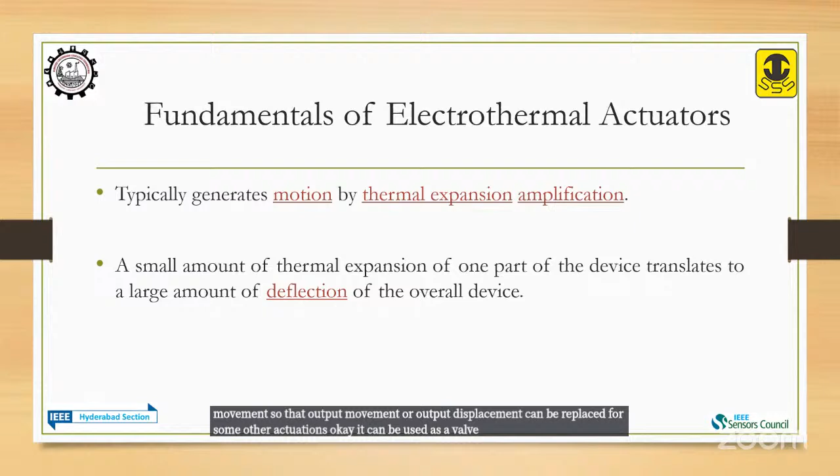The main advantage of using an electrothermal actuator is that it can generate comparatively better output displacement due to its thermal expansion amplification. That's the main advantage of choosing an electrothermal actuator. So even when we are giving a small voltage, some corresponding thermal expansion will happen in the device as an output movement. That output displacement can be utilized for other actuations. It can be used as a valve, it can be used as a switch.

The main working principle of the electrothermal actuator is Joule heating and thermal expansion. What do Joule heating and thermal expansion mean? Due to the potential difference across the device, there will be a current flow through the device. When there is a current flow through a material, obviously there will be a thermal expansion. That thermal expansion will be treated as the output displacement. Here with the picture I can demonstrate that.

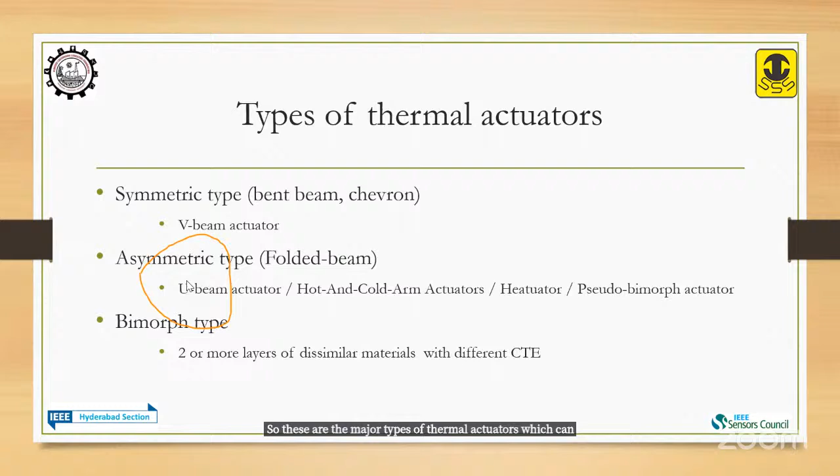And the last one is the bimorph type. The main difference from the previous ones is that here different types of material will be coated over the device, having different CTE, coefficient of thermal expansion. Due to the change in CTE, the thermal expansion happening in each part of the device will be different. Accordingly, sometimes we may even expect out-of-plane thermal expansion, or thermal expansion in some particular direction. So these are the major types of thermal actuators which can be implemented under the electrothermal actuator category.

So this kind of actuation we'll be expecting. We can visualize this in our simulation when we apply the respective potential across the voltage node and ground node. There will be a thermal expansion in this direction. So in the V-beam actuator, we get thermal expansion based on the inclination which we design in the structure.

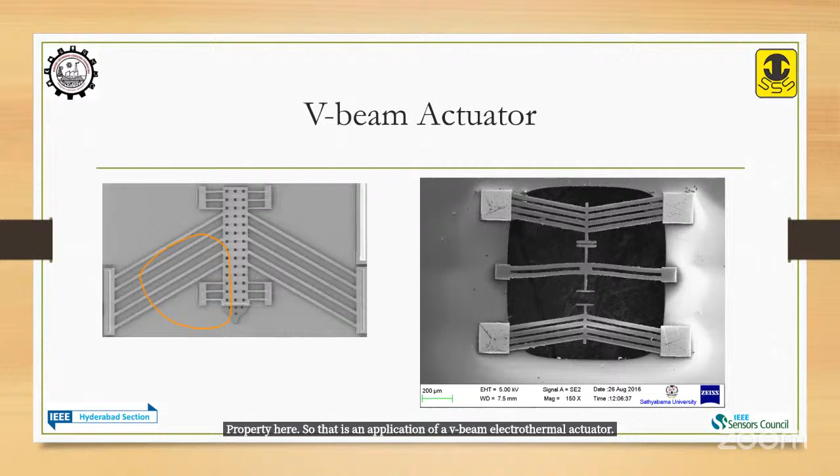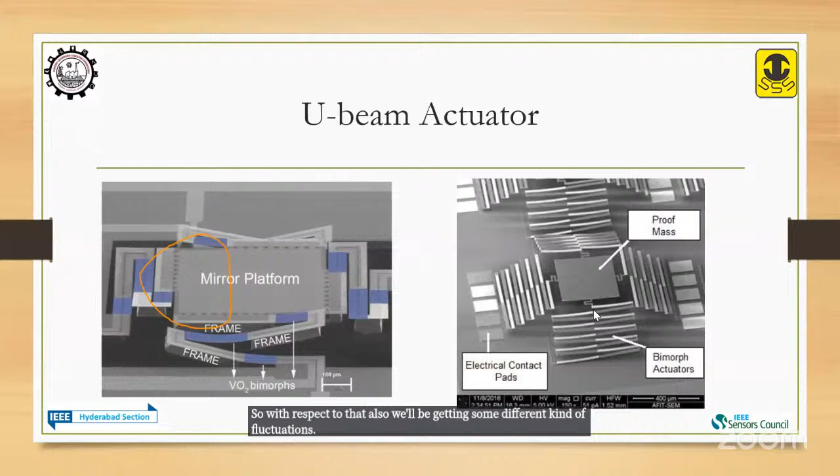Okay, and this is a sample image of a bimorph actuator. Bimorph I already told. Different materials will be used. The difference will be based on the coefficient of thermal expansion. So with respect to that also, we'll be getting some different kind of fluctuations. So that is an example of a U-beam actuator.

Now we will proceed with the demonstration of how we can design one basic electrothermal actuator in the software tool. Okay, so for this purpose, I have prepared one handout. In that handout, the step-by-step simulation process is mentioned. I think that will be shared with the participants soon. And for participants who didn't install the software, especially COMSOL Multiphysics 6.2, I shared it with the group with the help of ma'am. So that one also can be utilized. Those who want to do it in parallel can get the software and install it. One by one I will explain each step, and accordingly we can proceed.

If someone can respond whether I can proceed with the software or not, please mention it in the chat box. Or if any further discussion on the electrothermal actuator working is required, I can explain that also. Or we will directly proceed with the simulation tool. Okay, it is downloading.

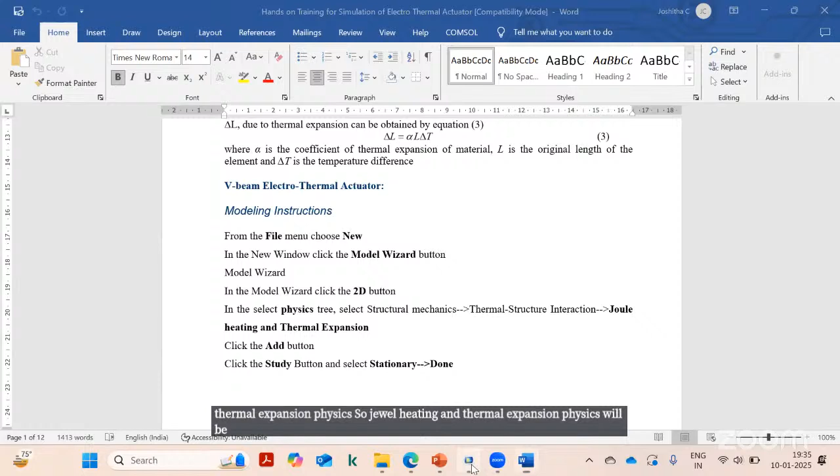Okay, so already I mentioned for the electrothermal actuator, the basic principle of working is Joule heating and thermal expansion physics. So Joule heating and thermal expansion physics will be visible under the structural mechanics. Once you install the software, there will be different sets of physics. That's why it is called multiphysics. So you can work with different physics.

Here, the electrothermal actuator, which is our interest of work, falls under structural mechanics. Okay, under the structural mechanics, there is a thermal structure interaction physics. From that, we can choose Joule heating and thermal expansion physics. The steps are clearly mentioned in the document. So once you open the software, we have to take 2D, and from the 2D it will be asking you to choose the required physics.

So once we understand what is the physics behind our design, accordingly we have to choose the physics. Here, we are going to design an electrothermal actuator. So the working principle of an electrothermal actuator is Joule heating and thermal expansion physics. Here in COMSOL Multiphysics, this Joule heating and thermal expansion physics is available under structural mechanics, under thermal structure interaction. So I am going to choose that.

Okay, so double click on that. It will be getting added to your file. So it is getting added. So once the first step is completed, we have chosen a new file, and it will be asking you to define the physics. Physics is defined. Now we have to choose what kind of study we have to implement. Okay, so study means analysis.

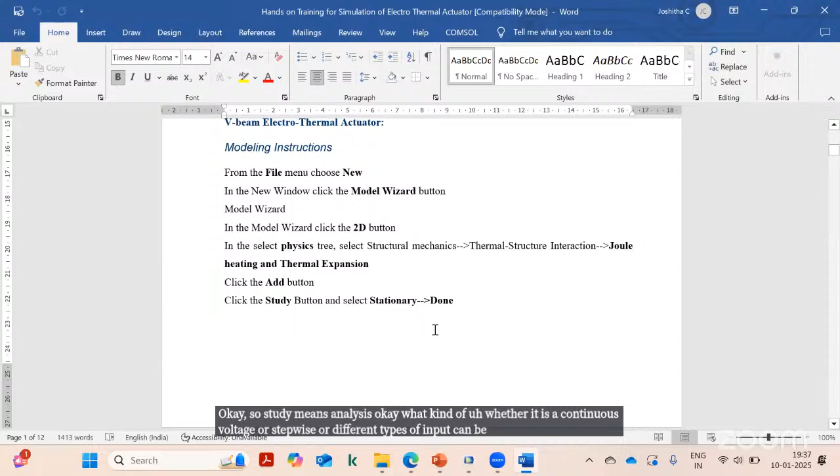Whether it is a continuous voltage or a stepwise or different types of input can be given. For example, I'm going to give a continuous voltage supply. So for that, it will be asking you to decide the study. So study can be a stationary study or a time dependent study. So I prefer to do here the stationary study. Stationary study means suppose I want to give a voltage supply. If I choose stationary study, it will indicate that I am continuously giving the potential.

So if you want a stepwise potential, you can define the time dependent study. So with some variables we will be able to give time defined potentials, like initially 0 volt, then 5 volt, then again 0 volt, stepwise, or different values of potential can be given. So here we prefer to use the stationary study. So click on done. So now we added both physics as well as study to the file. So it is getting added.

Once both study and physics are defined, it will be coming to a new window like this. Initially we have defined the component or the structure as a 2D design, meaning two-dimensional design. That's why we are getting a graph like structure like this, in X and Y axis. If we choose 3 dimensions, then we will be getting an X, Y, Z 3D plane. In the beginning, let us do only 2D. Then later we can convert that into 3 dimensions also.

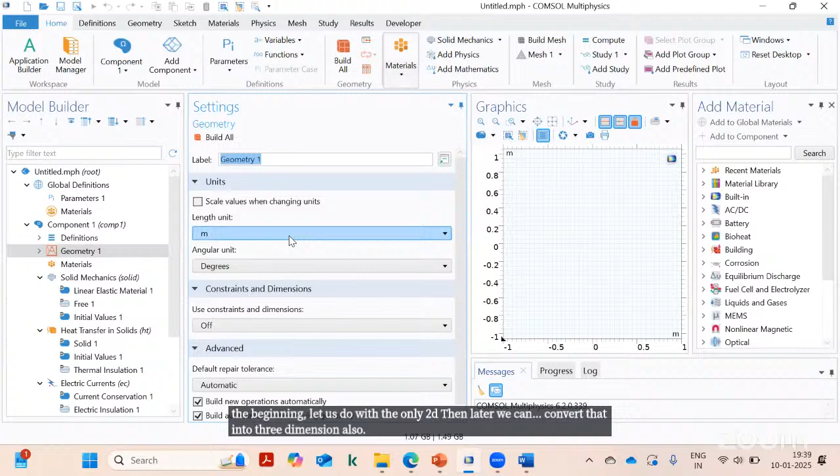So here, the first thing we have to change is the length unit. By default the dimension will be in meters, but we prefer MEMS devices in a few micrometers or in the millimeter range. So I would like to change the unit of length to micrometer. That will be mentioned here, length unit. So you can see that in the graph also, the dimension or the unit got changed. Okay, so that is our third step here.

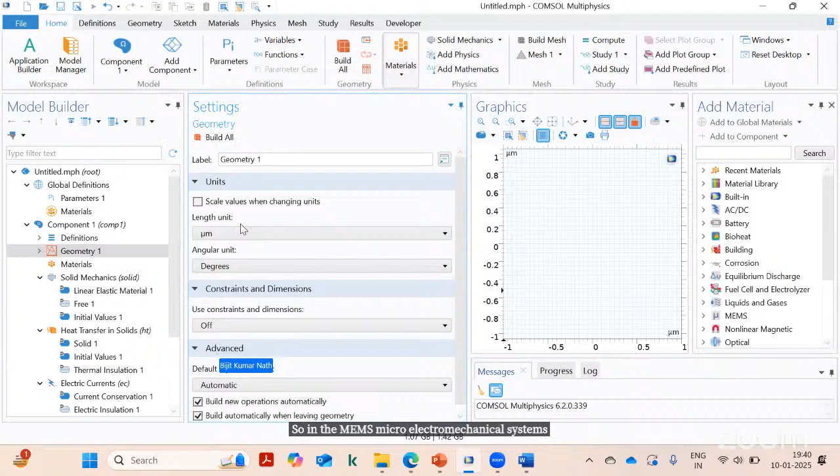So initially, for what model we are doing, we have chosen 2D. Then what kind of physics to be added, that also we have done. Next, what kind of study we have to do, the stationary study, we have chosen. Then what length unit we preferred. In MEMS, micro electromechanical systems, we prefer micrometers. So I have chosen the unit as micrometer. So these are the initial steps we have to follow. The same things are mentioned in the document also.

Okay, so here there are different options. First one is creating the geometry. If you right click on this geometry, there are different options. In the pop-up window, you'll be able to see you can draw a circle, ellipse, rectangle, square, or any other structure. So depending upon our design structure, we have to choose the shape.

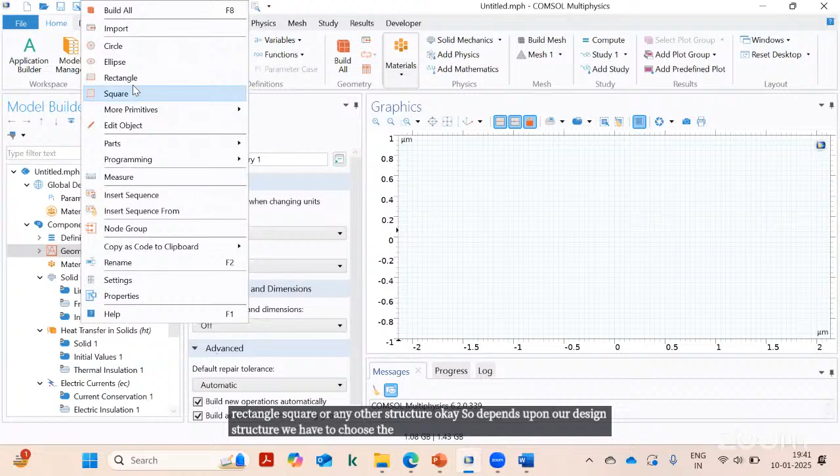Here I need a rectangle first because I need the anchors. In the V-beam actuator, I have multiple rectangles where we have to define how much length and how much width is required for each beam. So here I need the first anchor, the voltage node or a ground node. I can define it according to the dimension. I'm going to give the length and width as 100, and then we have to click on build selected. So here width and height is mentioned. There we have to enter the dimensions required for our structure.

Our V-beam has two anchors like this. One anchor will be used as a voltage node, another anchor will be used as ground node. So how to define this? For that I have chosen the first one as a rectangle by right clicking on the geometry. From the geometry I will be choosing rectangle, and I'll be mentioning the size of that rectangle as 100 micrometer and 100 micrometer. You can even consider a square. A rectangle can have a different length and width. Here I am considering the same length and width, so it can be a square also.

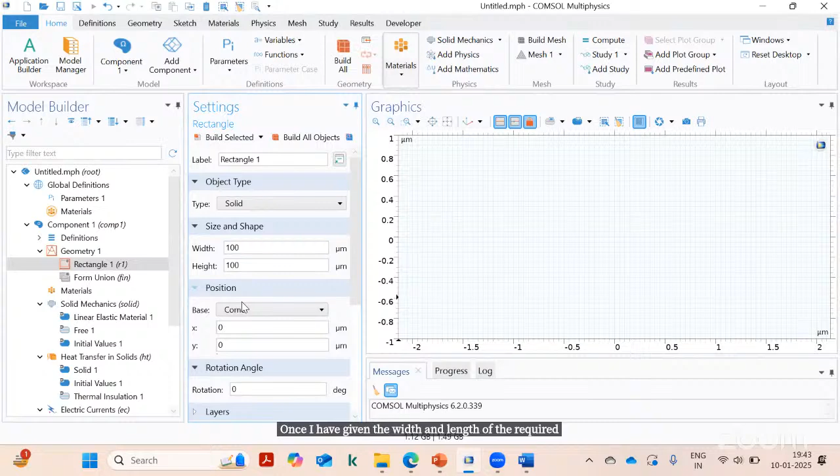And this position indicates at what point it will be started. So the origin will be like this, from the X and Y axis where the dimension will start. Once I have given the width and length of the required rectangle and where it is placed, that also we can mention here. Initially I am keeping it as 0, 0. Once I click on build, I will be getting a new structure like this. That means one rectangle is drawn here.

Then next step, we can adjust the position. I want it around minus 100 micrometer away from the origin in the x direction. That I can mention here in the position as minus 100. That indicates that from the origin, this particular point will move back minus 100 in the x direction, the negative x direction. Once again click on build, and you can see now the position got changed. Now it is minus 100 and 0, the x and y value of this point. That depends upon the designer; we can choose what position to keep.

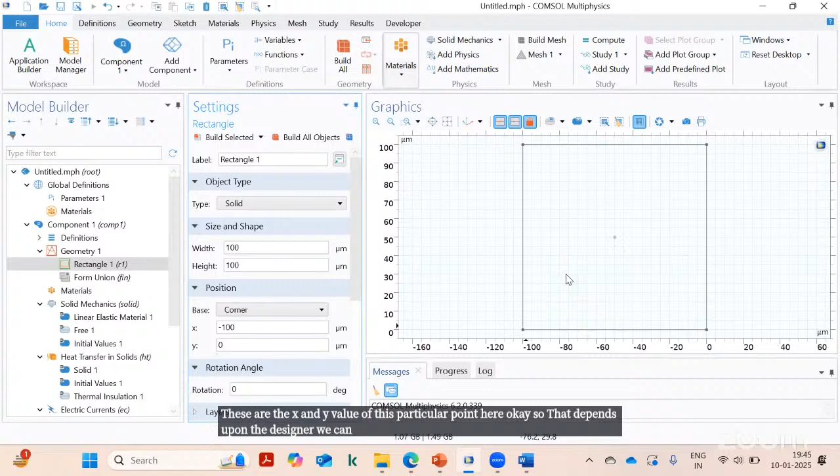Here we can see a few more things, like rotation angle. Sometimes we have to give some inclination to some of the beams. Then we can define how much degree of inclination is required for that particular beam here. Since this is a fixed anchor, I don't need any inclination, so I'm just keeping it like that. Now I need some extra parallel beams here to make the V-beam structure.

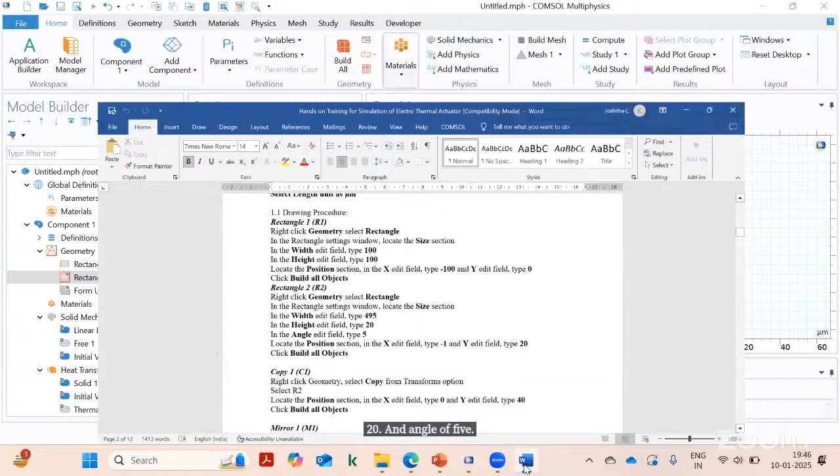So again, go to the geometry, click on the rectangle. The required dimension we can mention here. In the document I have mentioned how much dimension is required; these are predefined values, and depending on your requirement you can adjust them. I am giving the width and height as 495 and 20, and an inclination angle of 5. So I'm keeping 495, 20, and angle of 5. Position I have to verify; here position will be the same.

You can see that here one beam got placed. A little adjustment we have to make here. In order to visualize this point, I am zooming in using this zoom tool. I can make some adjustment in the position, like -1 to make it a little more inward. And the y value also I can adjust a little to move this point up.

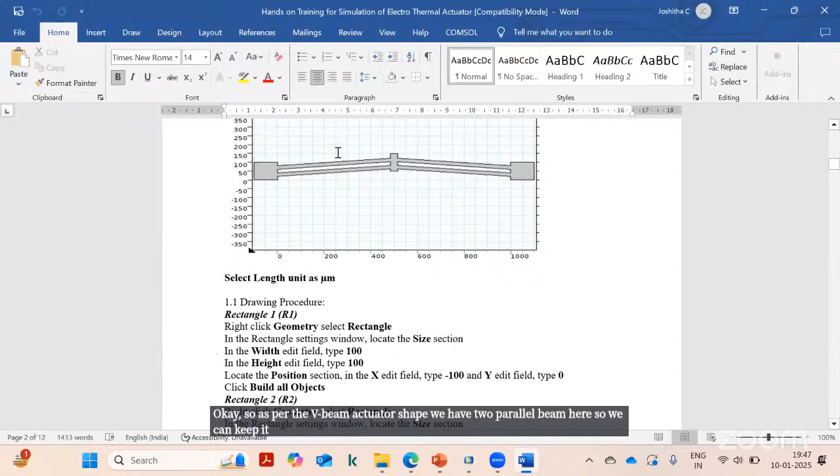So now if you visualize, you will be able to see a fixed anchor here and one inclined beam here. Okay, so as per the V-beam actuator shape, we have two parallel beams here. So we can keep a copy of our bottom beam as a top beam. So in order to do that, we can copy the same.

For that purpose, the copy option is available under geometry. You have to click on the transforms. If you right click on the geometry, there are transform options. Under the transform option, click on copy. It will ask you which object to be copied. So that object you can click like this.

If you bring your mouse pointer over the particular element to be selected or copied, click on that. Okay, so you can see that that particular element got selected. R2 is nothing but our second rectangle which we defined. So this is our first rectangle, this is our second rectangle that we defined here, and there is an option called keep input object.

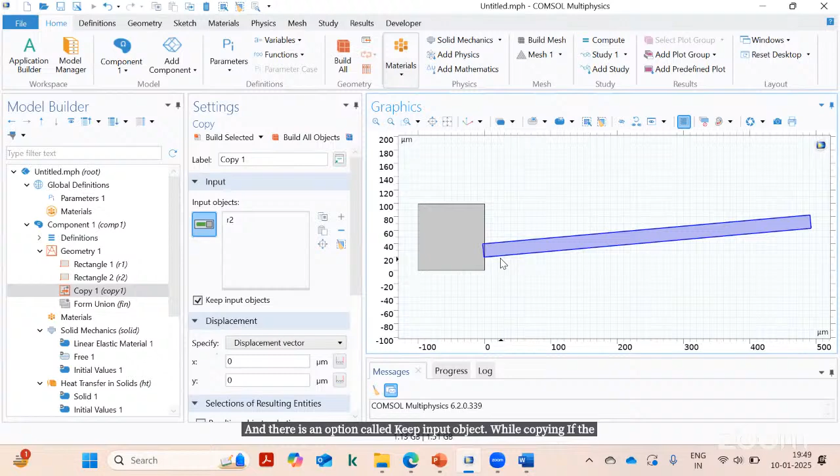While copying, if the first object is to be copied and maintained there, then you can put the tick mark there. If you want to just copy and delete the first one, then you can untick it. I need both beams in parallel, so I'm keeping the same. And here we have to specifically mention how much displacement from the previous there should be. That is the displacement vector, from the initial input object.

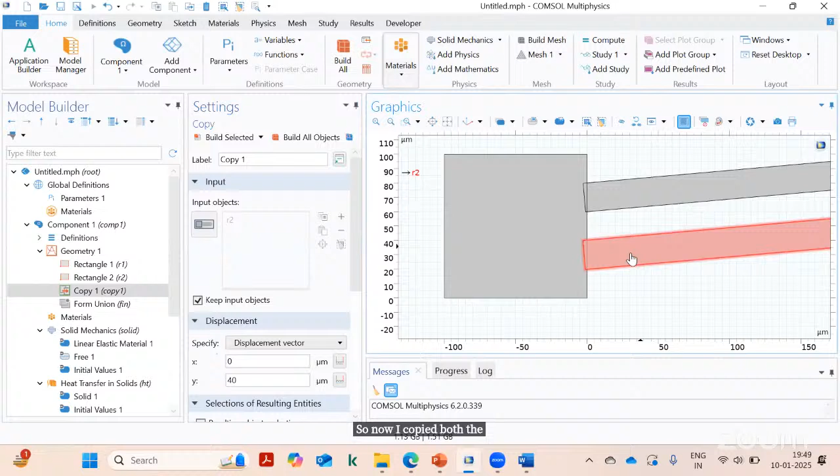In the document, I mentioned the displacement as around 40. I need 40 micrometers above, so in the y direction, in the upper direction only. So I think you got the idea. So now I copied both the beams here. First beam is here, second beam is here. Since keep input object is ticked, both are available. If this is not there and I build, the previous one will get unselected. So I need both at a time.

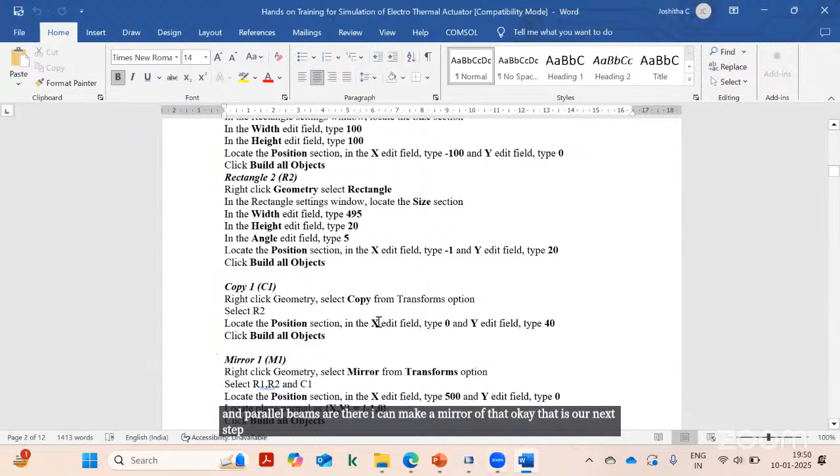So I got both beams here. Now we are defining a symmetric actuator. We know that the V-beam actuator is an example of a symmetric actuator. So with respect to the origin, both sides should be similar. So I can make a mirror image of this part, the anchor and parallel beams. That is our next step, which is mentioned in the document. So that is the mirror option.

The mirror option means whatever component elements are available on the left side can be mirrored on the right side also. For that I am going to choose the mirror option, also available by right clicking on the geometry. Go to transform and there is an option called mirror. Previously we used copy, now we use mirror. Again it will ask what input objects are to be considered. I need the mirror of this fixed anchor and these beams also.

And also I need to keep the input objects. I need both sides symmetric, so I will put the tick mark here. These are the initial setup for mirror. And how far it should be mirrored, we have to mention the position. I'm keeping the x field as 500, y field the same. So around 500 micrometers displacement in the x direction. Only the point of reflection I am mentioning.

And this normal vector to line of reflection means in what way it should be reflected, whether it should be flipped with respect to the x-axis or the y-axis. For us it should come in the opposite direction, so in the x direction it should get flipped. So I am giving x as -1, y as 0.

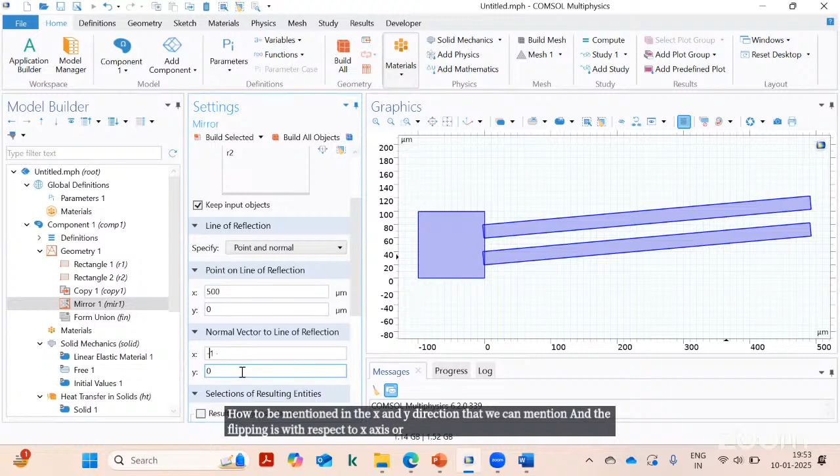So the mirror is very easy. Whatever objects are to be considered, we select as input objects. If the input objects are to be kept as such, we put the tick mark. Then the displacement in the x and y direction we can mention. And whether the flipping is with respect to the x-axis or y-axis, positive or negative, we can mention with the normal vector to line of reflection option.

And finally, click on build selected. So now you can see that symmetrically you got both structures; on both sides you got two anchors and parallel beams. Okay, now we need a central point where it can connect both parts together. Okay, for that also we can use one

rectangle. Okay, so in the geometry, we can select another rectangle, with a dimension of width 30 and 100. Okay, so I'm going to choose that. In the geometry, go to the rectangle. I'm giving the width as 30 and 100.

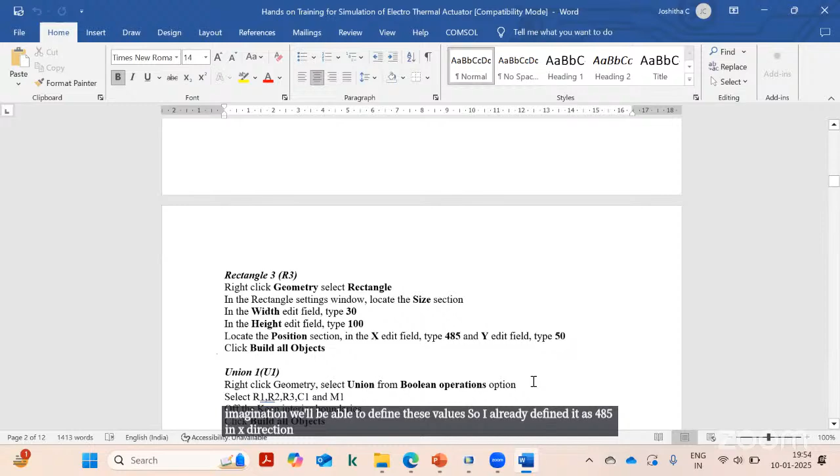And position, we have to be careful. After doing a few simulations, you will be able to understand how to give the position properly. So with some imagination, we will be able to define these values. So I already defined it as 485 in X direction and 50 in Y direction. So just enter those values, 485 and 50.

So now you understood that both sides got interconnected using a central beam. Okay, so these are the major components or elements in the geometry of our V-beam actuator. Okay, so now we want to consider it as a single element, as a single device, we have to define it. So here we can see that it is inserted here, like that. So in order to overcome that and in order to visualize the entire structure as a single device, we can make a union of each component.

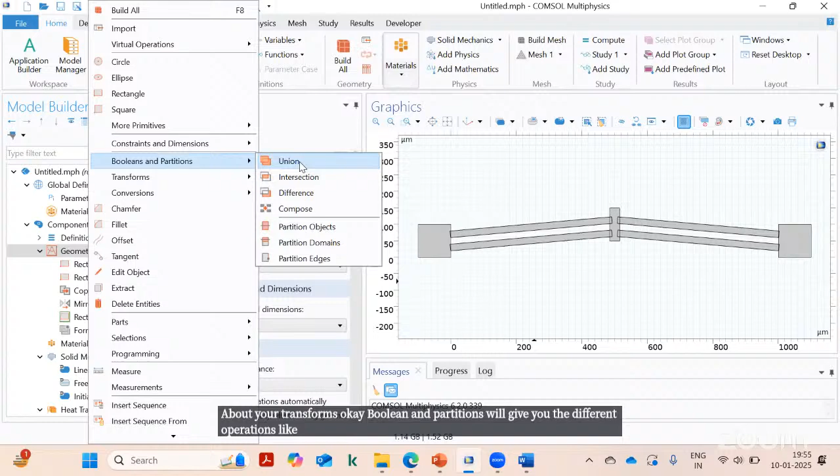For that also, you can go to the geometry and go to Booleans and partitions. One option is there above your transforms. Booleans and partitions will give you different operations like union, intersection, difference; different operations can be implemented. Here I need a union of all the elements to make it a single structure. So it will ask you the input objects to consider under the union operation. So I need all the elements. So one by one you can choose by clicking on each of the rectangles and anchors.

Okay, so I have chosen all the things and it will ask you to keep input objects or keep interior boundaries. Interior boundaries means like this. Internally you can see some kind of lines there. But as a complete object, I don't need the interior boundaries. It will not look nice. So I'm putting it as untick. Now just build and see the difference.

Now you can see all these points as an intersection here. Once I build it, you can see it as a single element. Okay, now it is a single element. With a single click, you can choose the entire element. Previously, it was one by one, individually. Now as a single element, we have developed the V-beam structure. These are the steps we have to follow for designing or drawing a V-beam actuator.

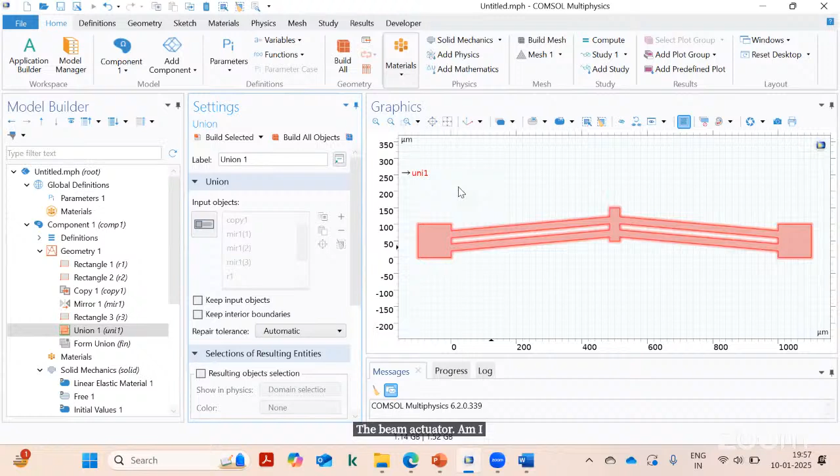Am I clear so far? If there is any doubt, please put it in the chat box. Any steps to be explained again?

Handouts are not received. Ma'am, you can share the handout also with the group, I hope. Otherwise, I will share. I have shared, ma'am. Okay, okay, ma'am. Yeah, now it is audible, ma'am. Okay. One Word document, ma'am, already shared in our group.

Confused in positioning the rectangles. Okay, I will see that. Positioning will initially be a little bit confusing, but with some 3D imagination or some kind of graphical imagination you will be able to place that. So some imagination is required, where we have to start from the origin, how much distance it will move left and right, like that we have to imagine a little bit. Then accordingly you will be able to place the position values.

Some trial and error is initially required. I also defined these values after trying multiple times. So initially, it will be a little bit confusing, but if you try 2-3 times, you'll be able to analyze, after keeping the X value as positive or negative, how much displacement will happen.

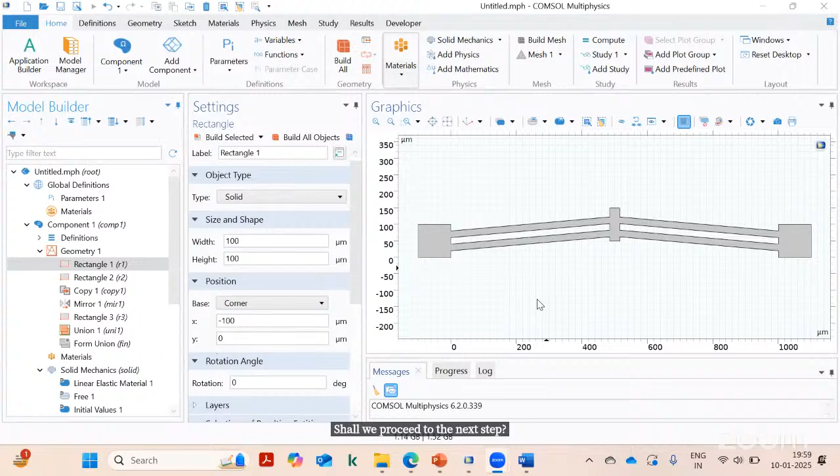Any other thing? Okay. Shall we proceed to the next step? So far, we discussed only the geometry implementation.

So I think geometry is clear to all of you. Now we have to apply the material to the geometry. Okay, now we have a V-beam structure here, and what kind of material is to be applied on this V-beam? Usually, with the help of IISc Bangalore, we are going to use the SOI MUMPs process for our device fabrication. In SOI MUMPs, it is silicon on insulator.

So silicon material is usually used for the implementation of our devices. For my device also, previously I have used an SOI wafer only. So I have to apply silicon to this structure. There are different types of materials. For simulation purposes, I can define any material; for analysis purposes, I can take any material. The only thing is, the material properties we have to define properly.

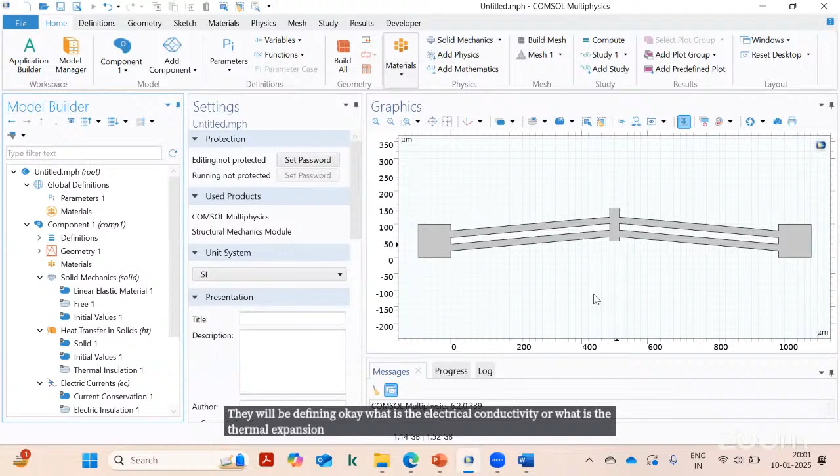For material properties, we can refer to multiple research papers. In each paper, they will define what is the electrical conductivity, what is the thermal expansion coefficient, or what is the Young's modulus to be followed. Like that, different material properties will be mentioned so that we can refer to them, or we can ask some fabrication-experienced people what kind of material properties we are using.

So here the software is giving you an option to add the material. The next step is to add the material to the structure which we are designing. There is a library of materials available in COMSOL Multiphysics. So click on the material. In the center, we can see one material option; click on Add Material. Then another window will pop up here, where we will be able to see different material libraries.

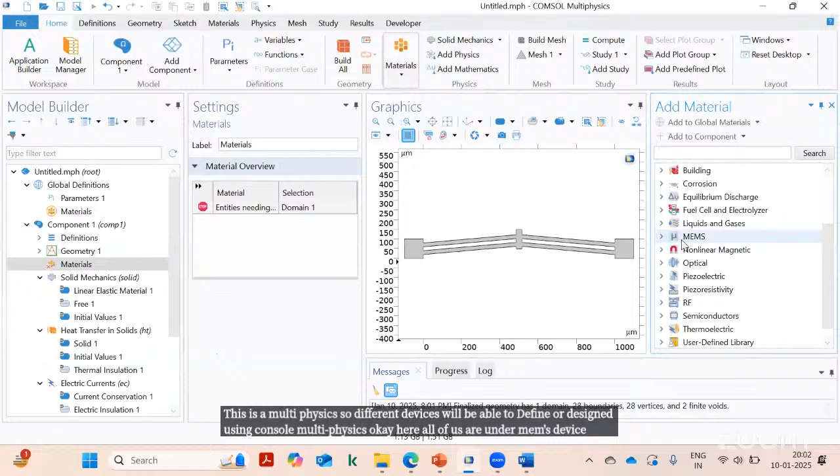As I mentioned, this is multiphysics, so different devices can be defined or designed using COMSOL Multiphysics. Here all of us are under MEMS devices, so I'm going to choose a material from the MEMS library. Under the Add Material option, there are different libraries, but choose the MEMS library, and under MEMS, we prefer semiconductors, because we are going to process with SOI MUMPs wafers. So we go to semiconductors, and under semiconductors, we choose silicon.

So I think the steps are clear. We have to click on Add Material. In Add Material, different libraries will open. We go to the MEMS library, then semiconductors, and under semiconductors we can choose silicon. In silicon itself, various types are available: isotropic, anisotropic, or polycrystalline. But in the fabrication process, preferably we'll be using single crystal isotropic silicon.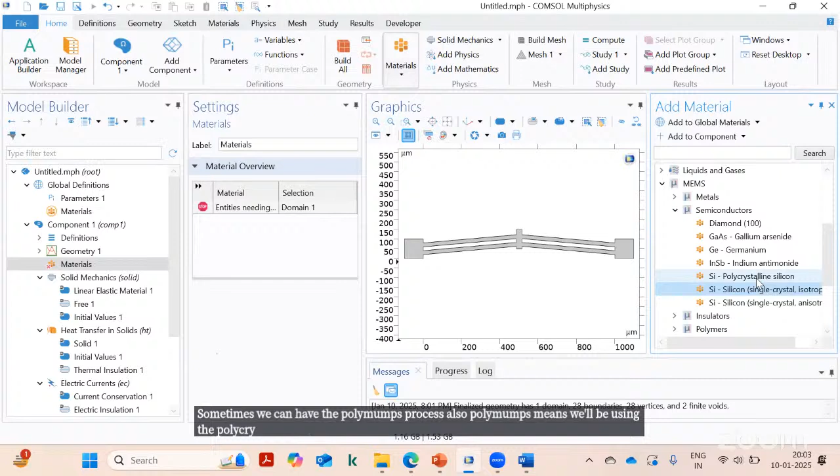If there is any variation, the fab lab will give us the instruction about which wafer we are going to use, or sometimes we can have the PolyMUMPs process also. PolyMUMPs means we'll be using polycrystalline silicon, so there will be some response difference when choosing this kind of material. For our design, let us choose silicon single crystal isotropic. So this is the material I am choosing here. After selecting it, double click on that, and the material will automatically get added

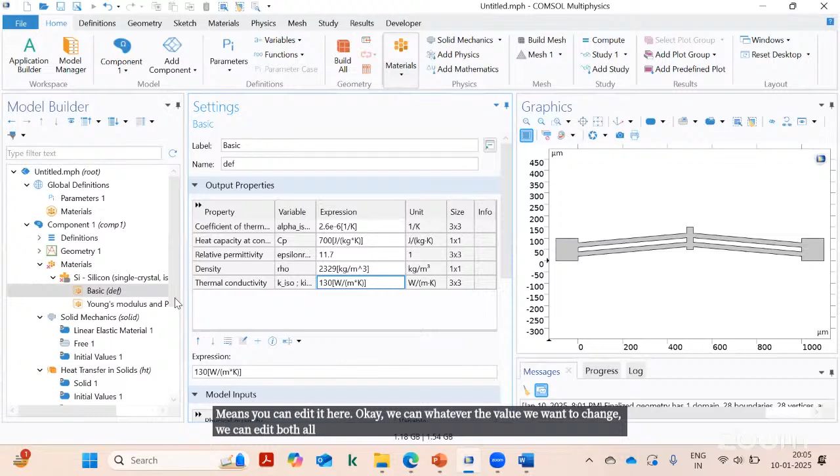So here, if you click on silicon, the electrical conductivity of silicon is missing. All the rest are already defined by the software, but electrical conductivity is not. So we have to research or analyze and keep the appropriate value here. From my analysis, I found some of the material properties. For silicon, the electrical conductivity is around 1.45 millisiemens. So that value we can copy and place there. I'm just copying that value here.

And we can enter 1.45e-3. So that is the value. Now you can see that also became a tick. That means the electrical conductivity value was entered properly; that's why it accepted the material value.

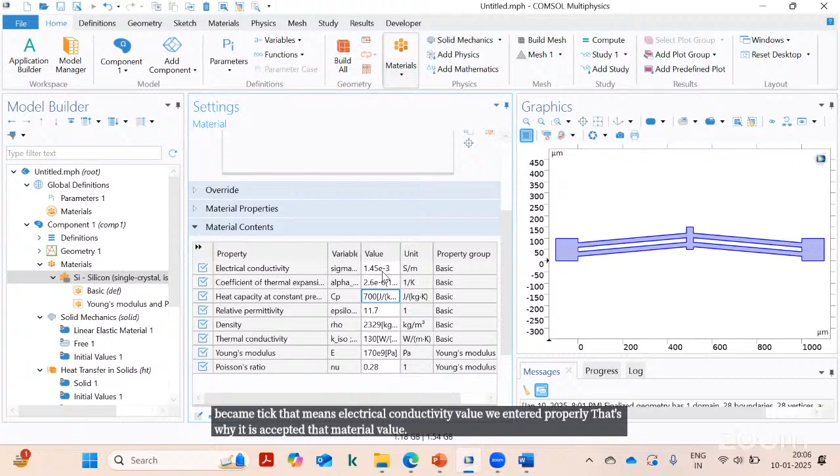Okay, so sometimes if we are choosing polysilicon, the electrical conductivity will be different. It is 0.25e4. So the electrical conductivity of pure silicon and polysilicon are different because of its atomic structure. So the basic physics you know about what is polysilicon and silicon. In the intrinsic silicon, the electrical conductivity is a small value like this, but in polysilicon, the electrical conductivity is like this, 0.25e4.

Okay, so at present, we are interested to use only the silicon. So I define the values like that. And if any other value change is required, we can enter those values. At present, I am not going to change any of the values. So the material got added as silicon and all the values are defined. So that is our next step after the geometry.

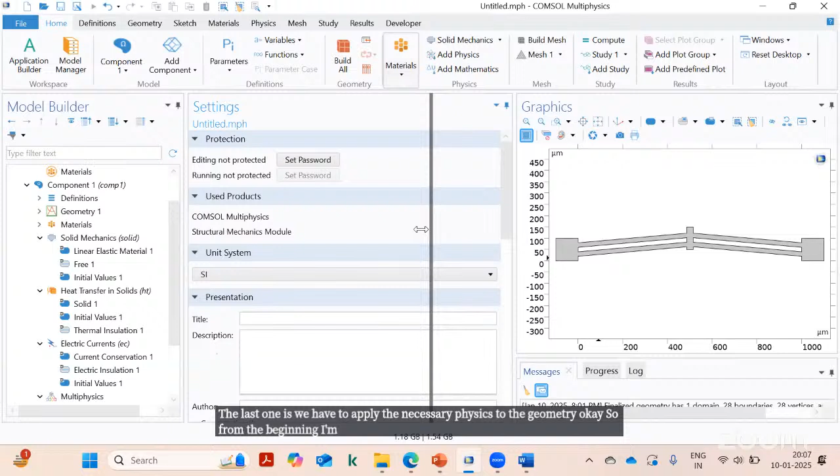Okay, so the next step is we have to define the necessary physics to the geometry. First we develop the geometry, then we define the necessary materials, and the last one is we have to apply the necessary physics to the geometry. From the beginning, I'm telling that for the electrothermal actuator, the working principle is Joule heating and thermal expansion physics. Once we add it to the file, you'll be getting multiple elements like this. It is a combination of solid mechanics, heat transfer, electric currents, multiphysics. All these kinds of physics will be added under the same category.

Once we add the Joule heating and thermal expansion physics, we'll be getting the subcategories like this. The electrothermal actuator should have some electric potential and also some thermal expansion or heat transfer property. Those physics we can define with the help of these subcategory physics. First let us see about the solid mechanics. Solid mechanics means we have to define which points or parts are considered as fixed constraint. I already mentioned that only the anchors will be considered as fixed. All the remaining beam structure is considered as a suspended structure.

Under that there will be a trench below the beam. In the trench, the V-beam will be able to move up and down, depending upon the thermal expansion. For that, we have to keep only the anchors as a fixed constraint. That fixed constraint we can define here. In the solid mechanics, just right click. There is an option called fixed constraint. Click on the fixed constraint. Then it will ask you which points are to be considered as fixed.

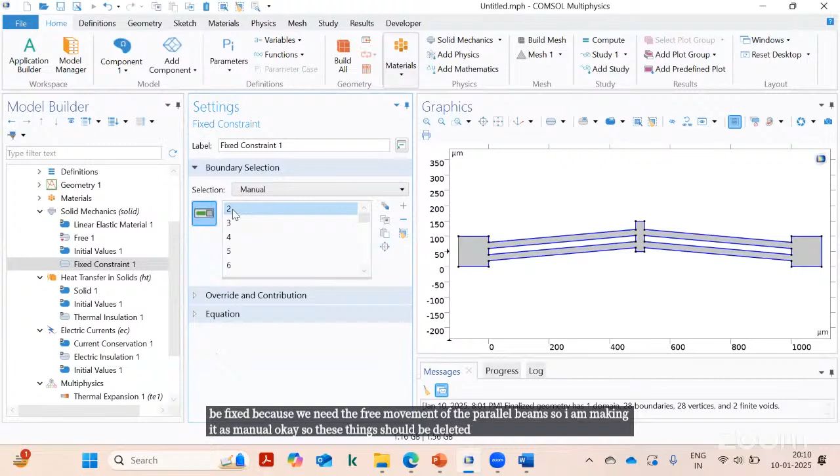There will be a manual option, or all boundaries selected by default, where all the boundaries will become fixed. But we don't need all the boundaries to be fixed, because we need the free movement of the parallel beams. So I am making it manual. These things should be deleted. Unnecessarily, I have chosen this. There are multiple ways we can choose this one.

Okay, now so far no boundaries are fixed. I need particular boundaries. For example, I need this boundary and this boundary to be fixed. By default, this entire rectangle area will become fixed at this point. You can mention it like that, or if multiple points are to be fixed, you can individually choose each one. For the time being, I am choosing only the last two boundaries as fixed.

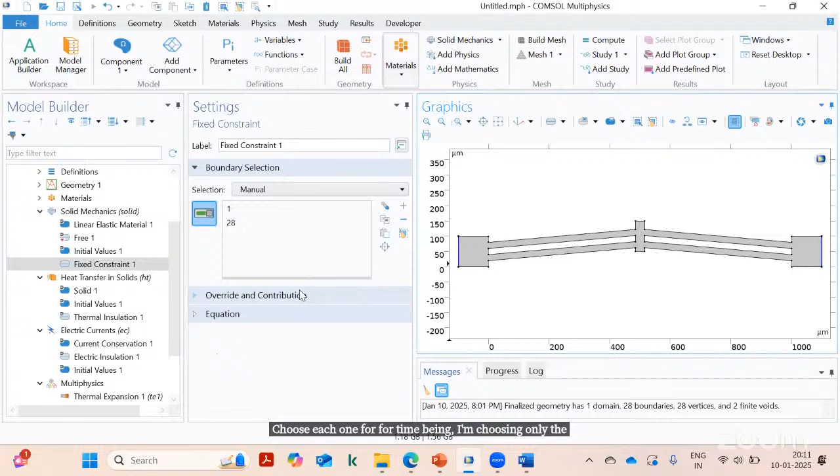Now, under the solid mechanics, the fixed constraint is done. Here you can define the remaining things. So which points are to be fixed, you can define; I am defining only the anchor part. Next, we have to go to the next physics part, that is heat transfer. How the heat transfer should happen in the device, we can define with the help of this physics.

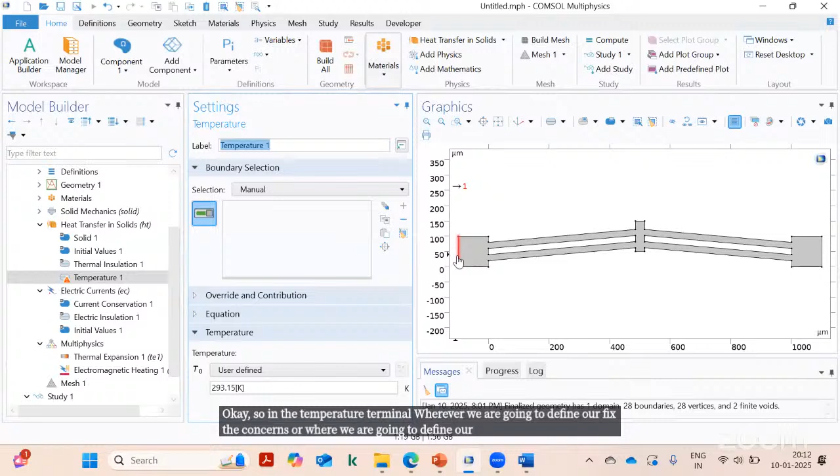For that, the first one is the temperature. In the temperature terminal, wherever we are going to define our fixed constraints, or where we are going to define our potential, at the same point we have to maintain the room temperature, 293 Kelvin. That is what this temperature definition means. Wherever we are going to define the potential and the ground node, we have to maintain the room temperature. So I am defining the temperature like that.

Another one under this heat transfer is heat flux. Heat flux means, as I already mentioned, it is electrothermal expansion. So due to the current flow, there will be a thermal expansion. That means the heat has to get propagated, or in a convective way heat has to be transferred from one point to another point of the device. Then only we will have the actual thermal expansion. So the heat flux has to move through the device.

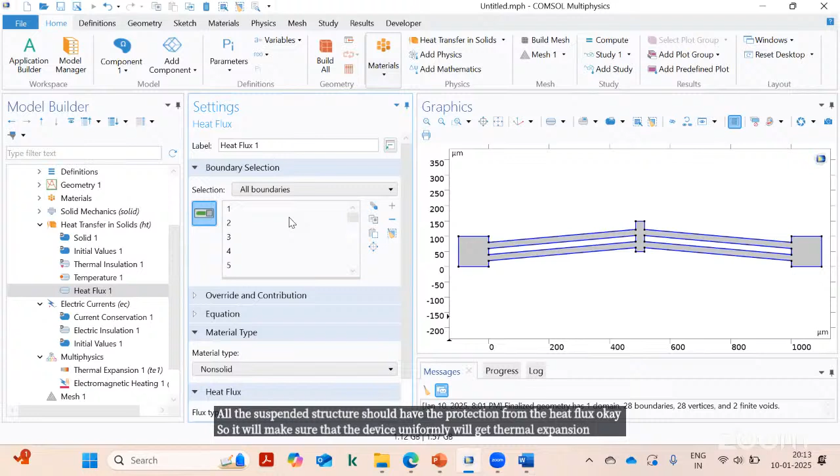For that, all the suspended structure should have the protection from the heat flux. So it will make sure that the device uniformly will get thermal expansion. So I'm choosing the entire boundaries except where I have defined the temperature. That is one major difference here. So all the boundaries I'll be choosing except the boundaries where I defined the previous temperature, or where I am going to define the voltage and ground node. So the remaining part should have the thermal expansion.

And in the heat flux, a few more values we have to define. We have to choose convective heat flux, because the thermal expansion will happen in this convective mode only. So for that, we have to define this convective heat flux. And generally the convective heat flux coefficient values will start from 5. At normal room temperature, the heat transfer coefficient is 5 for silicon. So I'm defining that value as 5.

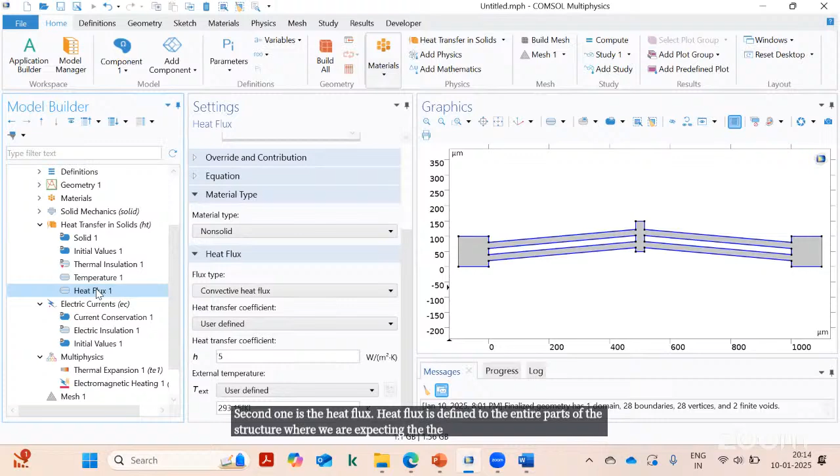So these are the two things we have to define under the heat transfer physics. First one is temperature. Temperature we defined only at the point where it is fixed, as well as where we are going to define the voltage and ground node. Second one is the heat flux. Heat flux is defined to the entire parts of the structure where we are expecting the thermal expansion. So we just kept those two things.

And the next one is the major thing. There we have to define the electricity. We need the flow of current. In order to have the flow of current, there will be a potential difference. Whenever there is a potential difference, there will be a flow of current. So in order to showcase that flow of current, I have to define the electric potential. So I will create one electric potential. Here it will be asking you the place where the electric potential is to be applied.

So here I am going to give some value, for example 5 volt. 5 volt, 10 volt, 15, any value you can give there with respect to our design concept. For example, I am going to test the device with the 5 volt power supply. So in order to have the potential difference, on one side we define the electric potential. Obviously, the opposite side we have to define with the ground. Then only the potential difference as well as the current flow will happen. So ground we have to define on the opposite side. So ground also we defined.

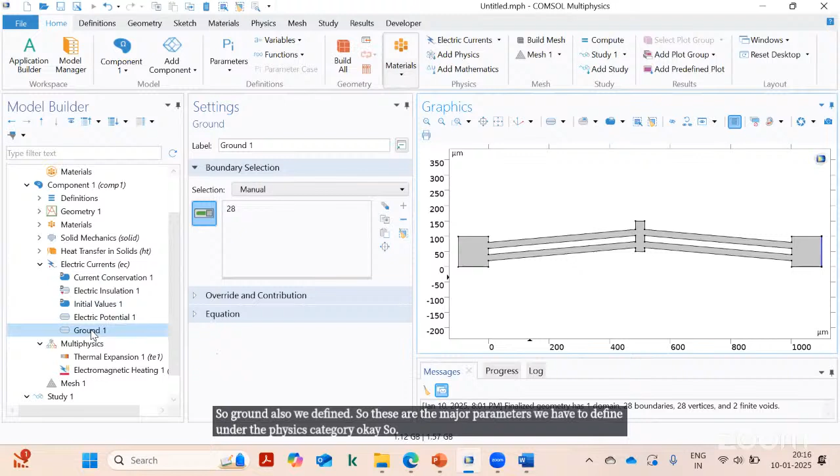So these are the major parameters we have to define under the physics category. So here electric potential and ground are also defined. So the major physics we also added. Now we have to analyze the simulation part. In order to analyze the simulation part, we have to define some mesh. Mesh means, we know that the simulations are some kind of mathematical operations. So this meshing will help us make sure that the physics which we are applying to the structure is getting applied on the entire design part.

So we can have different sizes of mesh. It can be a physics controlled mesh or user controlled mesh. Physics controlled mesh means by default some mesh dimensions are mentioned in the software, and based on the structure, it will give you some meshing. I will show you. This is the meshing. If you click on build, it will show you. So here you can see that there are some areas where the meshing points are not defined. It is a normal mesh.

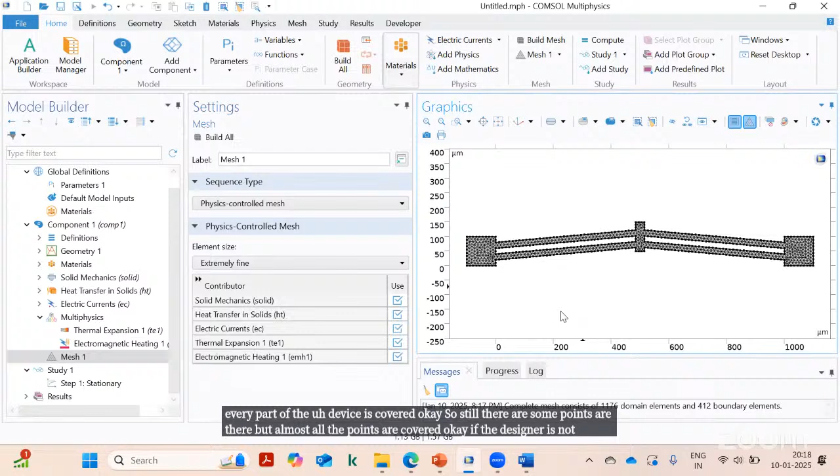So if I go for a little finer mesh, it will give you a little better analysis. But still here also some parts are not defined properly. So I will go for the extremely fine mesh. That will make sure that each and every part of the device is covered. So still there are some points, but almost all the points are covered. If the designer is not satisfied with the extremely fine mesh, then they can prefer the user controlled mesh.

Okay, so this kind of user controlled mesh we will be going for when we have a more complicated structure, like each and every point in the structure to be considered. At that time, we will be choosing user controlled mesh. That will take a little more time, but at present, we need only physics controlled mesh and extremely fine element size. If we choose that, most of our criteria will be satisfied.

Okay, so that is the last step in the mesh. So mesh is also added to the structure. Now, in the beginning, the type of study which we chose was stationary. I told you stationary means that the potential which we applied here, 5 volt, will be continuously provided. So we have already given that 5 volt. Now we have to start our simulation.

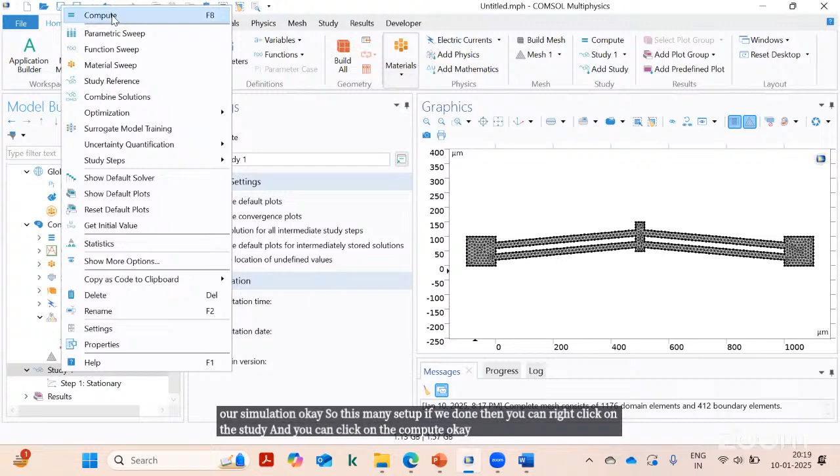So once this setup is done, you can right click on the study and click on compute. That will start our simulation. For the time being, I'm just clicking compute. So it will go to the simulation mode and run the simulation, and after some time it will give you the result. Just wait for that. You can see the progress of the simulation here. A few seconds or a few minutes, depending upon our device complexity, it will take.

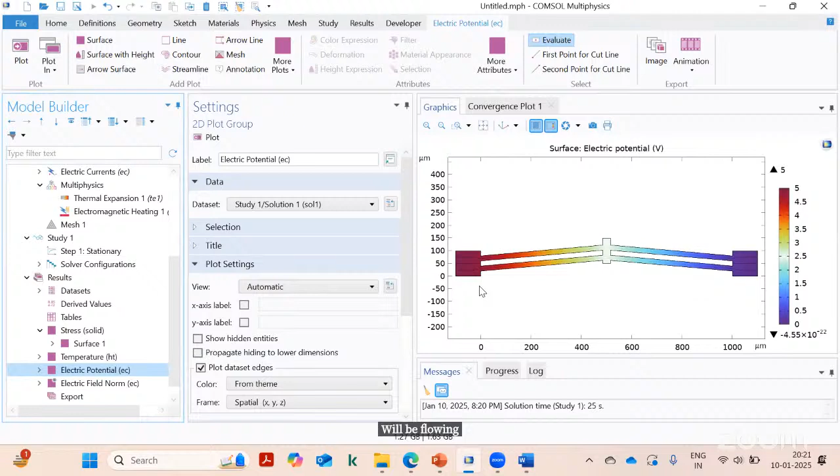This graph is showing the distribution of the electric potential. The electric potential we applied here is 5 volt, and here is the ground node. We can analyze the electric potential distribution across the device like this. 5 volt is represented with the dark red color, and ground is in the dark blue color, so zero potential is here. So the current will be flowing from this positive to negative. That also we can see here.

The electric field distribution will also be shown like this. So these are the major analyses we will be getting from the physics: how much is the stress, how much is the temperature, how much electric potential distribution is happening. These are the major things.

But fundamentally, what we are expecting is some kind of thermal expansion or output displacement. So we should know how much displacement happened from the original structure, whether it is a 5 micrometer or a 10 micrometer displacement, that we want to measure here. To measure that, we have to give one point in the physics. I will show you here.

It is under the component. We can give that before starting the simulation also, but in order to keep the continuity, I didn't mention it in the beginning. So now I am going to define that. We have to make sure that this particular tip has the maximum displacement. So we have to define a marker here, a particular point, and we will measure how much that point has moved upward.

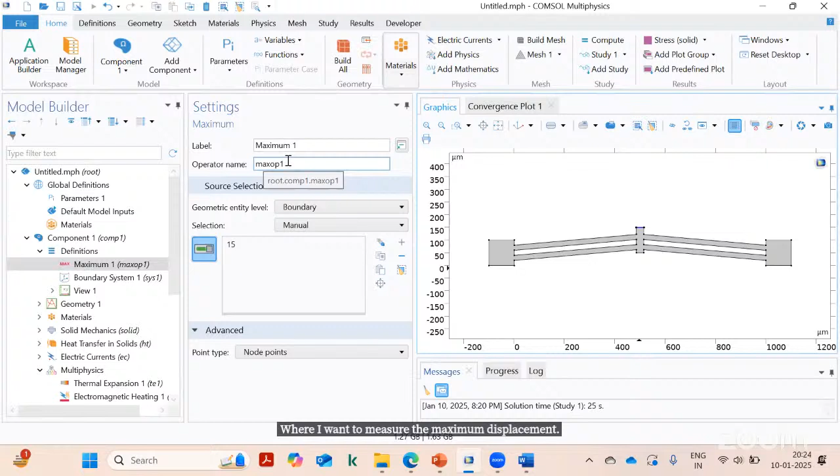I can select domain wise, boundary wise or point wise. If I need a particular point, I'll choose the geometric entity level as point. I need a boundary because the maximum displacement happens through this central part. So I will choose this boundary as my area of interest where I want to measure the maximum displacement. The operator name, by default, the software will give you as maxop1.

Okay, so this is one setup we have to do. Either you can do it initially itself, or after defining all the setup, you can define this one. So I define now to analyze the displacement. So once again, I will simulate it. I'm going to click on the compute. Then it will give you the displacement-wise also a graph. Will show you that.

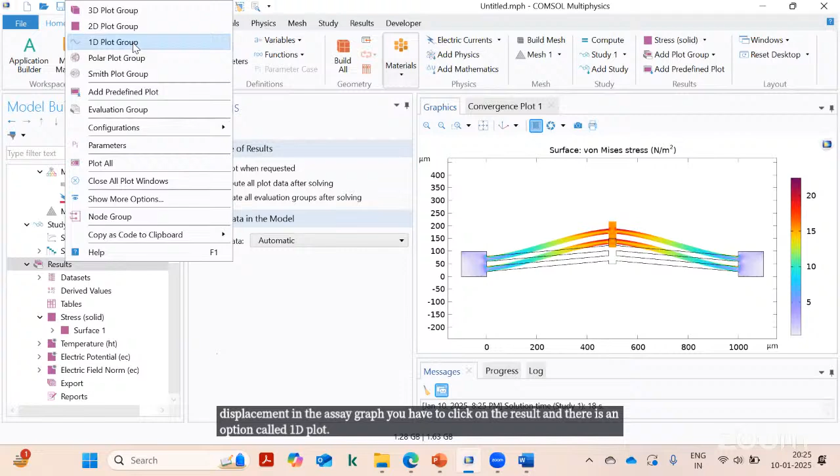So here it has completed the simulation. Now for getting the displacement as a graph, you have to click on the result, and there is an option called 1D plot. Okay, these steps also I mentioned in the handout. You can see that. So once we right click on result and choose the 1D plot, we will be getting a graph. Here in the 1D plot, choose one option called global. So another window will come here under the global.

Here we have to give the operator name. The maximum operator name is here, in bracket it is written as maxop1. And we understood that only in the upward direction the movement happened. In the software, upward direction is defined as y direction. Y direction will be represented as small letter v. If it is x direction, we have to represent it as small letter u.

So I need the displacement of that central part in y direction. So I am going to plot it. I have given maxop1 in bracket v. Why I am giving v means I need the y direction displacement only. So click on plot. Then you will be able to see there is a small point here, one blue point. If you click on that, it will be highlighted and it will show you how much displacement happened for that particular boundary.

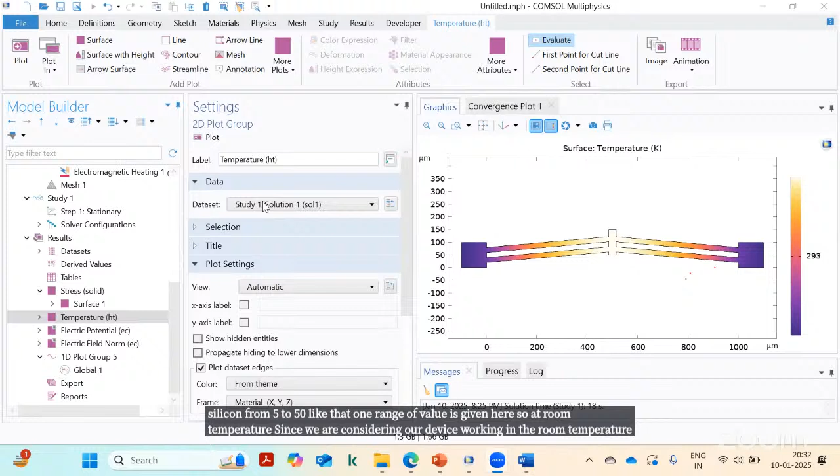So for silicon, from 5 to 50, one range of value is given here. So at room temperature, since we are considering our device working at room temperature, the minimum value by default they are giving as 5. That's why, from some research paper, I have chosen the value as 5.

Okay, on dynamic input, I will just show. And one person asked about the material properties, unable to add the material property. Material property is very simple. Only thing, we have to click on the material and the add material library will be coming. Click on the add material.

So here we have to choose the library. For our structure, we are using MEMS library. Under the MEMS, go to the semiconductor and click on the silicon single crystal isotropic. Then once we double click on that, it will be getting added. And by default, some of the values may not be defined.

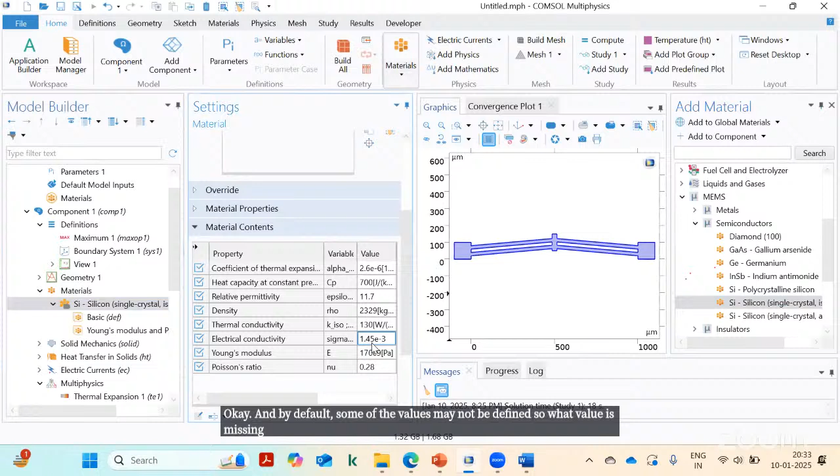So whatever value is missing, that particular value we have to define. For that, you can refer to some previous paper, or from the experience of fabrication and some materials we'll be getting those values. So this is the way we have to define the material properties. I hope I have answered that.

Okay, coming to the, what is that? Study, stationary study or time dependent study. Here itself I will show you that either we can have the stationary study or time dependent study. That study will be added from here. In the new file, I will show you that. Model wizard 2D. Go to the study and you choose the time dependent study.

So if you want to save the previous file, we can save the file with the appropriate name. VB actuator demo, like that I'm just saving. And it will be giving you the new file with the time dependent study.

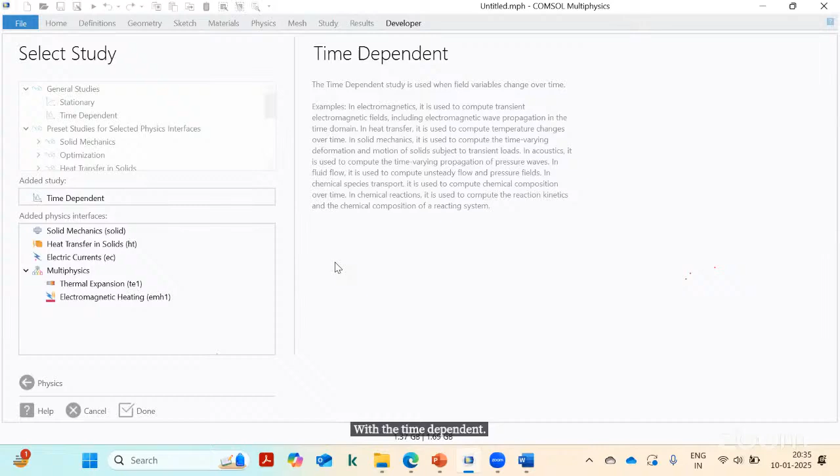So the initial steps will be the same. You have to draw the geometry. You have to keep the unit as micrometer preferably. All the geometry will be drawn with respect to our dimension requirement, and materials, physics, all those things will be added. Then here, one second.

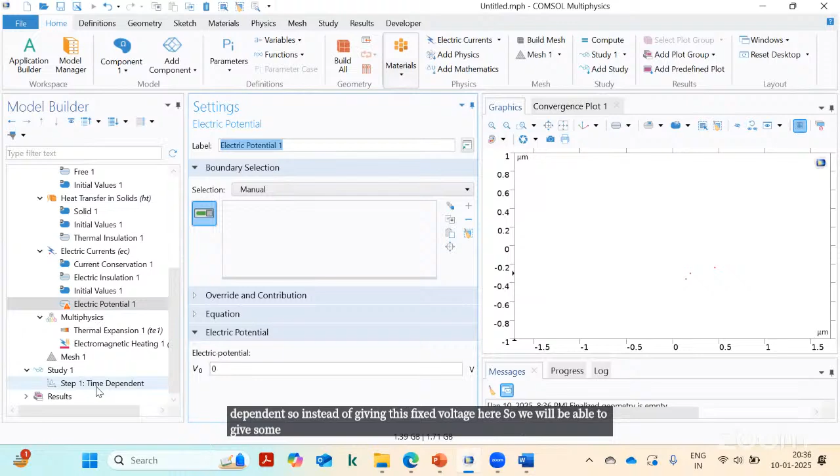Here, this electric potential, we are going to define it as time dependent. So instead of giving this fixed voltage here, we will be able to give some parameter values. So for that we have to define those parameters. Parametric sweep option will be there.

Mm. I got confused at that point. Parametric sweep, one option will be there. There we will be able to define the values like 0 volt, 3 volt, 5 volt, again 3 volt, 0 volt, like that. That sine wave kind of thing, we will be able to provide the values. At present, I'm not able to find that.

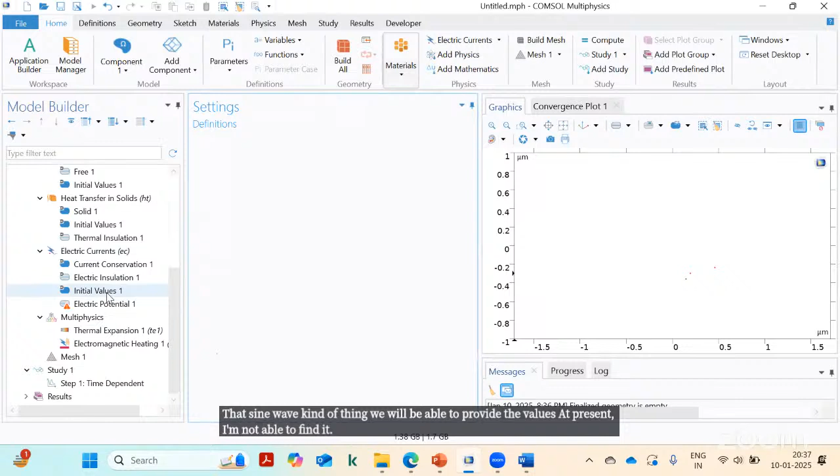I'll be updating that in the document. At present, I don't have those values with me.

Material got added but not showing material properties. So once again, I will show how to add the material. If you double click on that, automatically the material will be getting added here, and just expand that material. It will be showing you the material properties here. So here, what are the values to be added, you can choose that.

Why is it not getting added? Because if you install the software properly with all material libraries, it should be coming by default. Please make sure that you install the software with all material libraries, all physics, all materials, everything you have to keep tick marked. Then only by default everything will be getting added.

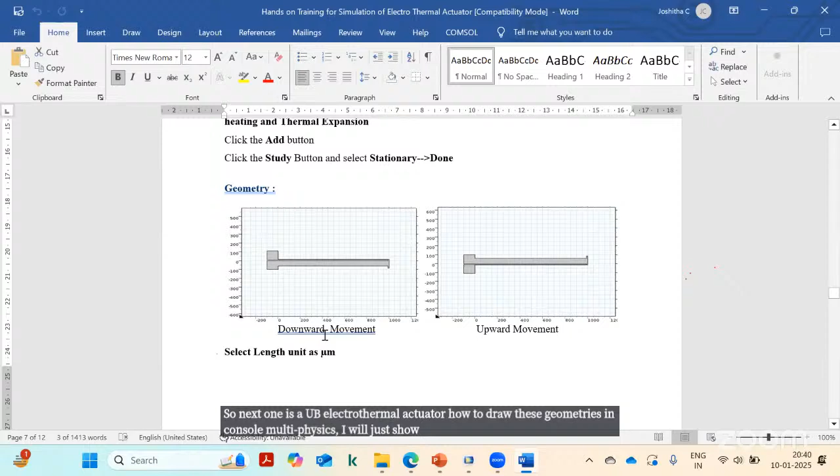So we have seen the symmetric actuator, and the displacement measurement we have also seen. In the same way, the asymmetric actuator, especially the U-beam actuator, I'm going to explain once here. You can see the same thing in the document also. So the next one is the U-beam electrothermal actuator: how to draw these geometries in COMSOL Multiphysics. I will show one with downward movement and another with upward movement. Okay, so let's follow these steps.

I'm taking a new file, 2D, and physics from Joule heating and thermal expansion. We are adding the physics. The steps are the same. These are the field components I mentioned earlier: U means X, V means Y, W means Z. Then proceeding to the study, I prefer stationary. Done. The previous one, I'm just deleting. So we got the window again, in a similar way. The unit has to be defined as micrometer. We define that.

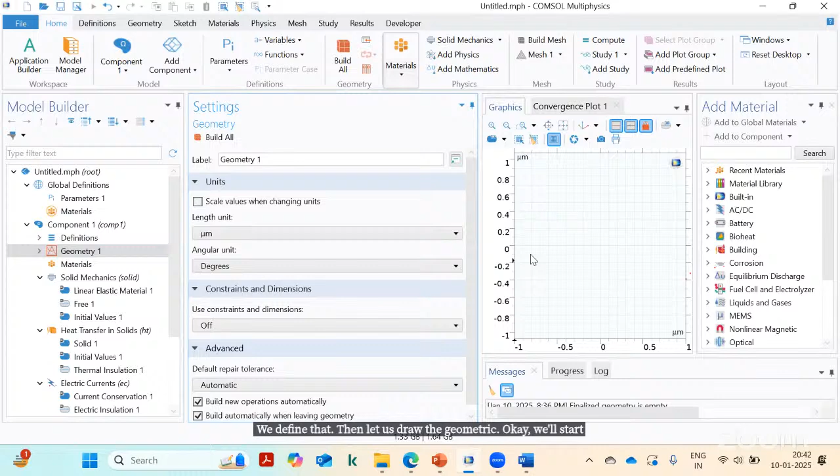Then let us draw the geometry. Same way, just understand what geometries need to be there. One rectangle is required, with 100 dimension and position -100 and 0. In a single stretch, you can define all these things for the rectangle. Dimension is 100 by 100. Position is -100 and 0. There is no rotation angle. So the first one is defined. In the U-beam, it is in parallel, so I can keep a copy of that, with a y displacement of -110.

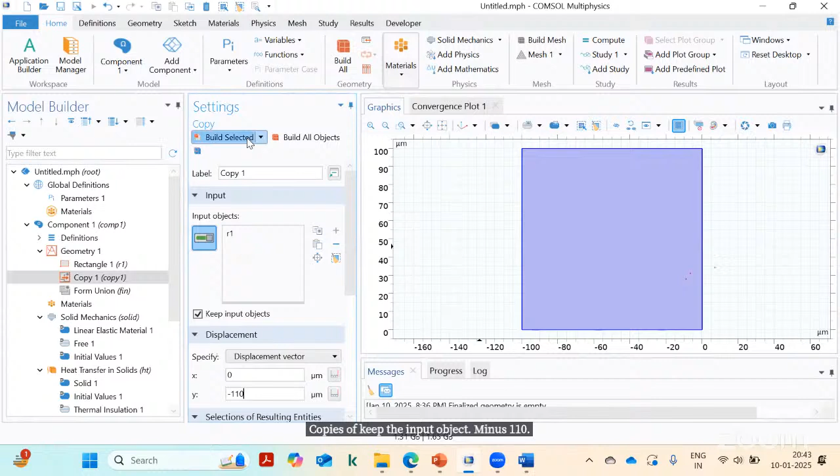In transform, copy, keep the input object, -110. So it will come downward. You can see that two anchors are kept in parallel because we need the U-beam like this. So in the U-beam, what are the remaining things? Another rectangle with a different dimension. It should have a width of 1000 and a height of 60 micrometer. Position you can define as -1.5 and 0.

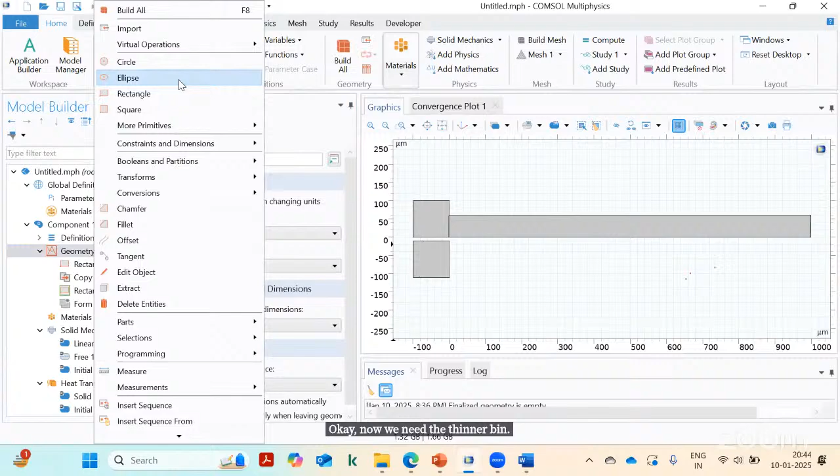So we defined the first, thicker beam. Now we need the thinner beam, or the hot beam rectangle. The dimensions can be 1006. These are variable values only; it depends on your requirement. We can define the thickness and width. Here I am choosing one example like this. Position -1.5 and -16. So both the thick beam and thin beam we have defined.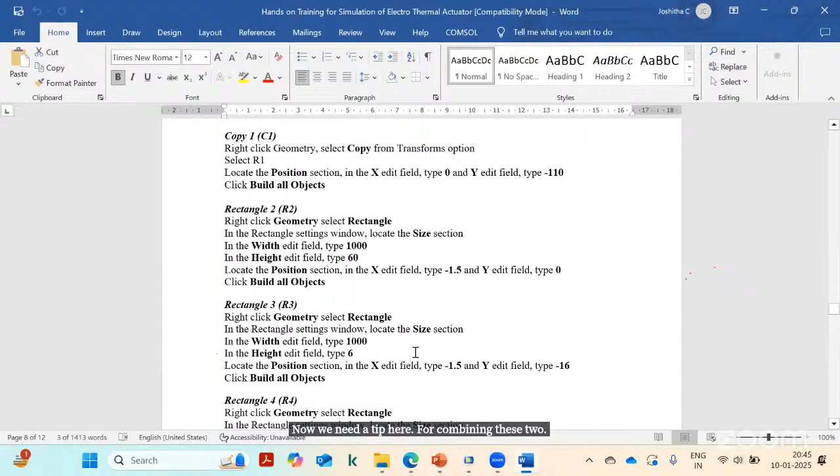Now we need a tip here for combining these two. Let us see the dimension of that: a small rectangle with width 10 and length 100, at 990, -16. So again add a rectangle, 10, 990. So we got the structure like that. Now we need the union of everything, because here we can see internal boundaries. We don't need those. We need a perfect single structure.

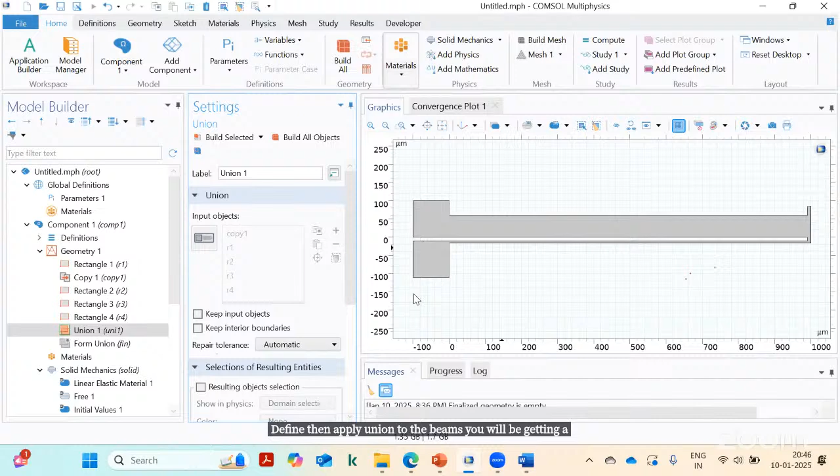For that, go to the Boolean operation, union of the entire structure. Select all those things, keep interior boundaries unticked, and select build. So we got it as a single U-beam actuator. The geometry is simple: define anchors and beams, then apply union. You will get a single device like this. Geometry is completed. Now apply the material: add material, go to the semiconductor MEMS library, and silicon. It will get added here.

Now check whether any properties are missing, marked with a cross mark, which we have to define. What is missing? Just check here. You can see electrical conductivity is not mentioned. So it is 1.45e-3. It got defined like that. Now there is no cross mark. All materials have been defined. Geometry completed, material completed. Now physics. Solid mechanics means we have to define the fixed constraint. These two boundaries I am considering as fixed. That is the solid mechanics physics.

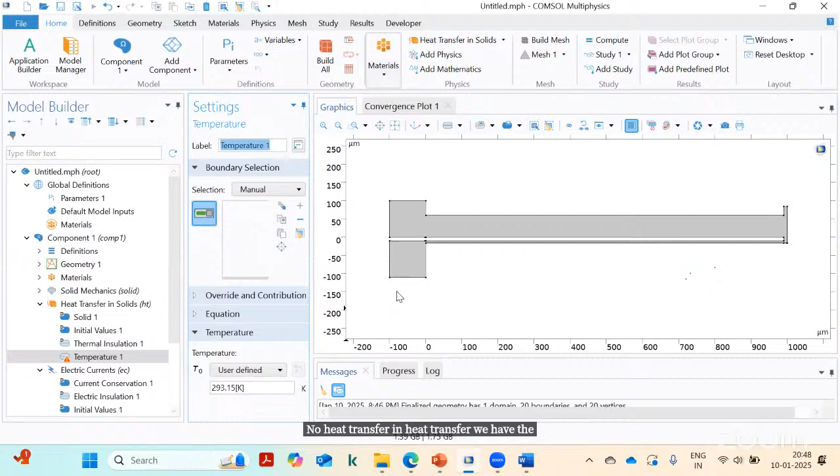Now heat transfer. In heat transfer, we have the temperature value. Where we apply the potential and the ground, we have to maintain room temperature, 293 Kelvin. So there we will define the temperature boundaries. And we have to apply the convective heat flux. Choose the flux type as convective heat flux. At room temperature, the convective heat flux coefficient is 5 for silicon, so I'm defining it as 5. So heat flux is also defined.

Now the potential: we have to define where we are applying the voltage and ground. So here I'm applying ground in the opposite beam. I am applying fixed constraint. I am applying 5 volt. For example, 5 volt I am giving. So the necessary physics is also applied.

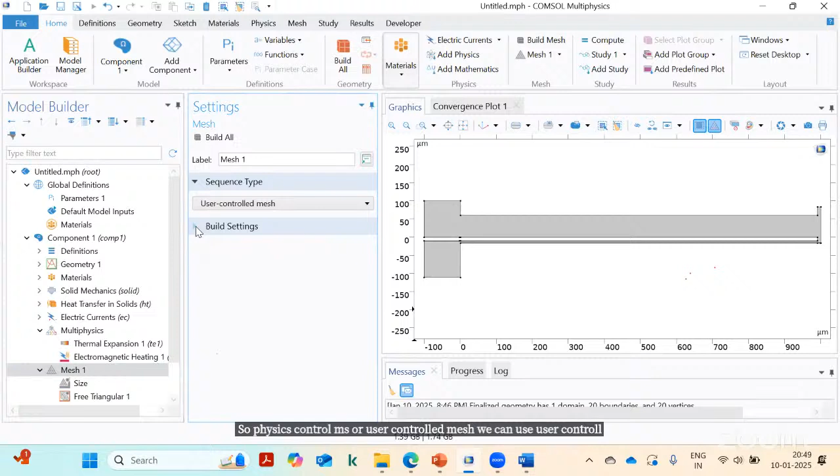Now we can apply the mesh. So physics controlled mesh or user controlled mesh we can use. User controlled means we have to define the values and all. Okay. So preferably we'll be using physics controlled mesh. Extremely fine mesh we will be choosing. So all the points have been defined properly. So meshing is perfect.

Now, anyway, we need the maximum displacement plot also. So at the beginning itself, let us define where the maximum displacement is to be measured. We can define that from the definitions under the component: go to the non-local couplings and choose the maximum. So that boundary we have to choose. I will be having the tip movement here, so I have chosen that boundary.

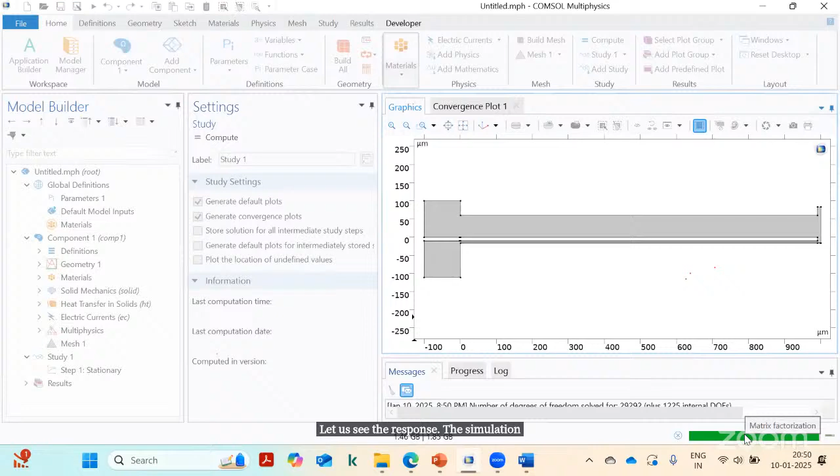So after defining all the physics, meshing, and the maximum point, I'm going to compute it. So click on compute. It will do the simulation. Well, let us see the response. The simulation is in process. So you can see that there is an upward deflection in this tip.

Okay, so let us see the stress distribution and how much the temperature is getting distributed. So you can see that the thin beam is having the maximum temperature. The thick beam is almost cool compared to the thin beam. That's why, due to the difference in thermal expansion, the thin beam will have more expansion compared to the cold beam. So it will have an upward deflection. Electric potential distribution: here we have applied the voltage 5 volt, and here it is the ground node.

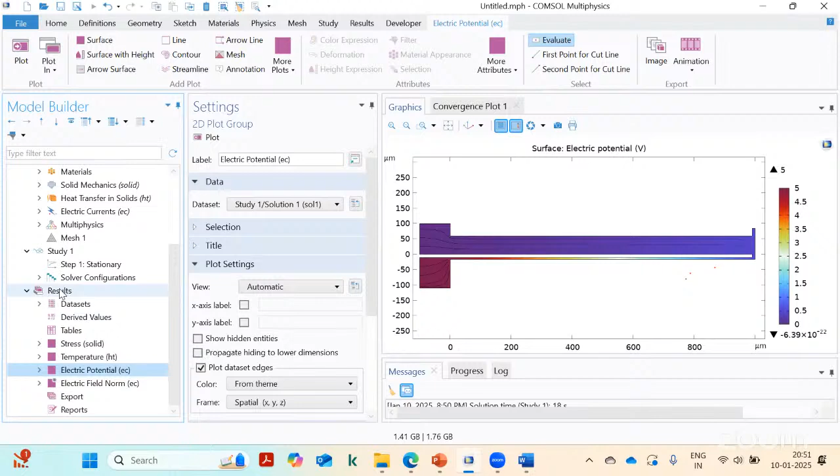And let us see how much displacement happened. For that, click on results, choose 1D plot group. Then in the 1D plot group, right click and choose global. It will ask you to give the expression. What is the expression? Max OP1. Upward direction means it is in the y direction. So let us keep in brackets small letter v, and plot.

So it will give a value of 2.5375 into 10 to the power minus 7. So almost 0.25 micrometer. It is giving you the dimension of displacement.

So these are the two electrothermal actuators we are basically using in various applications. One is the symmetric actuator, the V-beam actuator, and the asymmetric actuator, the U-beam actuator. The dimensions and the overall structure we can change according to our design concept, but the fundamental operation will be like this.

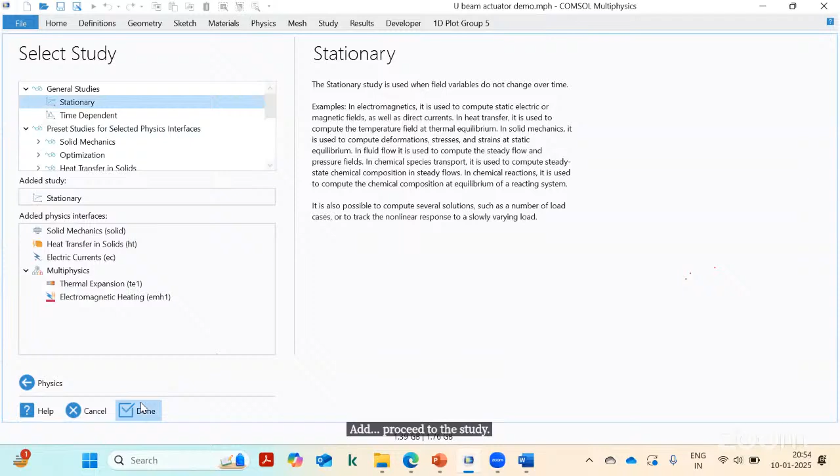So take a new one, model wizard, choose 3D. The steps will be the same: how we define the physics, the study and all. Same way define, add, proceed to the study. I'm defining stationary. Now if you define the unit, you can see here the window is changed. Previously it was a 2D graph. Now it is in 3 dimensions, it is 3D.

So here, if you try to draw the structure, previously it was a rectangle. 2D means only rectangle, square, circle kind of things. Here it will be a block, cylinder, sphere, so 3D shapes. There you have to define the values. Suppose I need 10, 10, 10, so I'll be getting a block here. That block you can rotate. So according to our convenience we can define it, and the position and everything. A little higher level of imagination is required here. Okay.

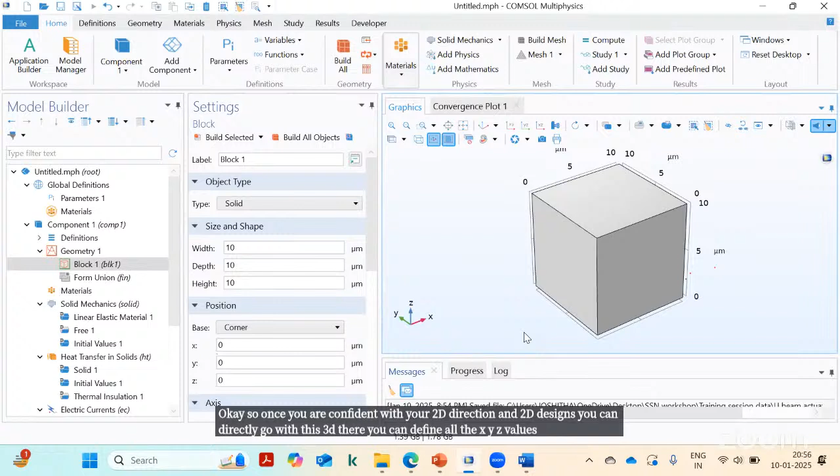So once you're confident with your 2D direction and 2D designs, you can directly go with 3D. There you can define all the XYZ values and implement it. Or sometimes you can export the values or export the design from 2D to 3D also. So that depends upon our requirement. We'll be choosing all those things. There will be some export options.

If you right click, an export option will be there. So export from 2D to 3D is possible. So that we will be taking under that. Any other doubt?

Why I designed only with the 2D structure is that if I choose 3D, the simulation time will be very high. The computational time will be more, and for demo purposes it may not be convenient. That's why I have designed only with the 2D structure. The same things we can design with 3D also.

So if you wish to proceed with the fabrication process and all, finally do the simulation with the 3D structure. Simulation time or computational time may be higher, but you will be clearly able to visualize in the simulations in real time how your 3D structure will work. Similarly, we will be able to see that.

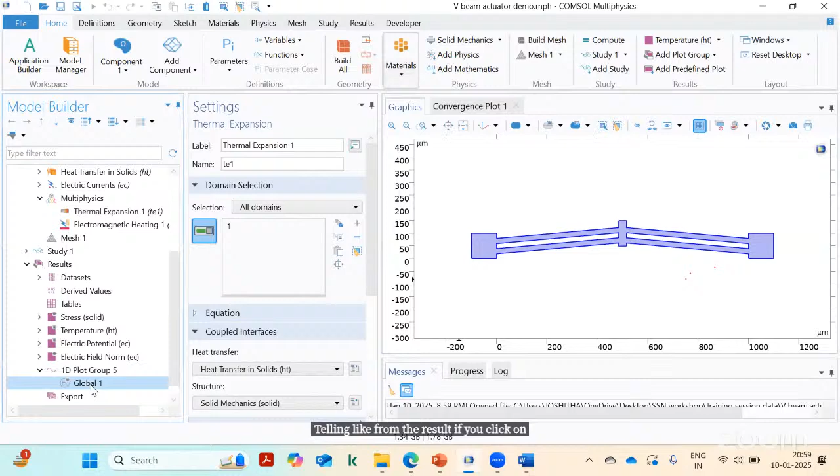Unable to see the value. Okay. We can download some values also. I will show you that. You are saying that from the result, if you click on export global, if you highlight this point, usually the value will be shown like this. If it is not coming, you can copy and see the data also. Copy plot data to table, one option will be there. So it will help us take the value, or there will be some export option.

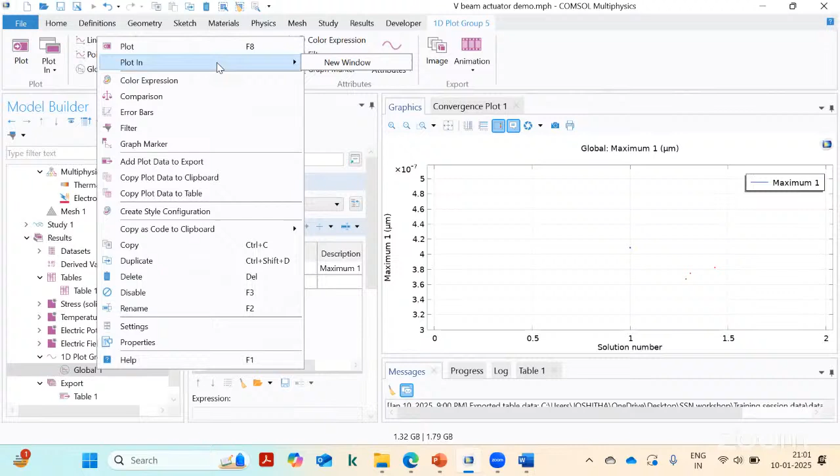What are the values required? We can take whatever it is. If you highlight this in a new window also, it will come, showing what the value is. We can extract or export the value in different ways, whatever way we need, in a table form or clipboard, or if you need some kind of images, those are also possible. If you want this particular image, we can choose here.

Okay, at a particular point, let us make a plot value. And if you go to the particular folder, it will show you the graph. So all these things are possible. We can note the value like this. From that particular point value, we'll be able to highlight that. Or if you need something in table form, that also it will show. Here the maximum value is shown like this.

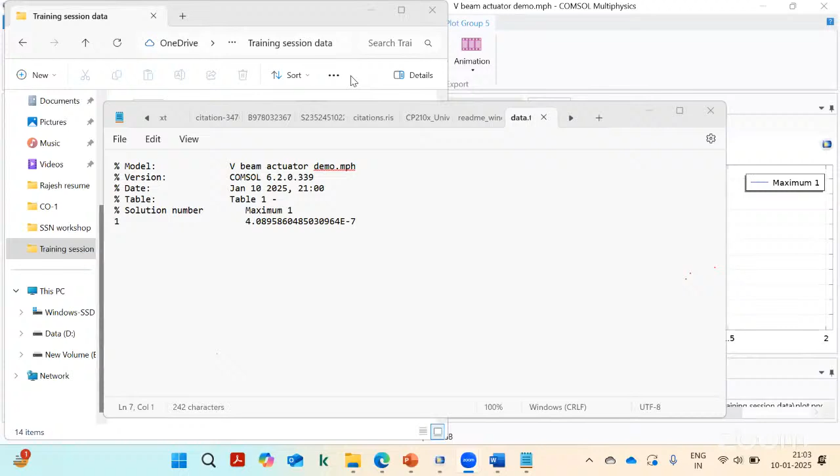For fabrication purposes, we will not get it directly from COMSOL, but we can export the file in .stl format. Okay. Yes, as Srija madam is saying, the fabrication process we'll be discussing in detail in the next session. This is only the simulation part.